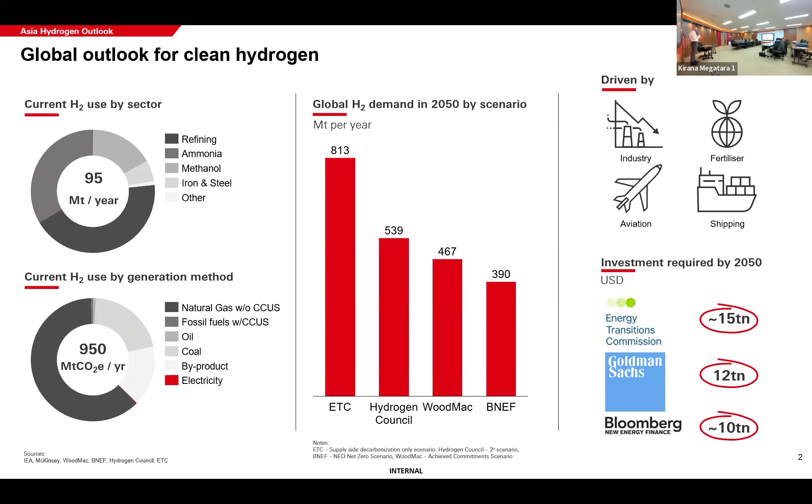So I said we're a commercial bank, we're interested in the commercials. To get to those kind of figures, we're looking at between 10 and 15 trillion US dollars of investment needed by 2050. So significant opportunity for the bank. And going back to that question at the start, why do we care about hydrogen? It's because we need it for net zero and there's commercial opportunity there.

So I can skip through some of these that won't interest the academics and try and skip to the ones that maybe do. But this is the Asia outlook for demand. So it's what I was saying before, but specifically for Asia. There's existing use cases. I was talking about the ammonia, the oil refining, the methanol. They're the existing use cases that we can try and decarbonize now. And as you can see, we're going to try and tail away from the gray hydrogen production mechanisms and try and ramp up green, which is electrolytic, or blue, which is carbon capture.

But then there's these new use cases that we're going to need. In Asia, most of it's going to be steel. So the way the steel industry works, there's primary steel and secondary steel. Secondary steel could be done with electrification. So you can use scrap steel and use electric arc furnaces powered by renewables or geothermal to melt that steel down. But the primary steel, where you're trying to get the iron out of the ore, you need a molecule, you need that reaction, you need the reducing agent.

So where hydrogen plays a role is, instead of using coking coal that we use now to A, generate the heat you need for the steel mill, but B, to actually sap the iron out of the ore, you can replace that with hydrogen. And if that hydrogen is renewable, you can vastly reduce the emissions from the primary steel industry. So there's going to be a mixture of hydrogen use and electric arc furnaces. But a big opportunity, specifically because if you look at places like India and China, a huge amount of steel production. So a good opportunity there to decarbonize.

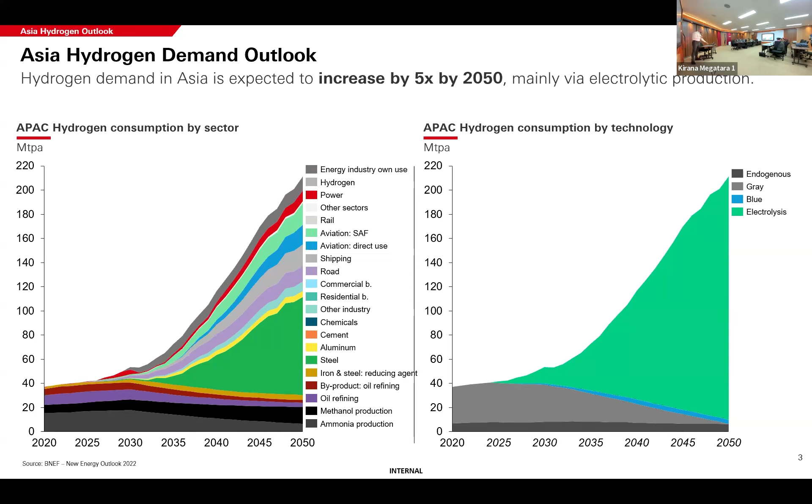And then we've got all these other new use cases that are a bit smaller chunks, but still really important. As I said, like power sectors, aviation, big, heavy, hard to decarbonize sectors. On the right-hand side, we can see from this new uptake in demand, most of it's going to be electrolytic. That's kind of the gold standard from an emissions perspective. So if you use renewables into an electrolyzer, there's no carbon emissions. As I mentioned before, blue does still have a carbon intensity associated with it, so it's a bit trickier to fully clean up, but it is cleaner than the counterfactual.

If we drill down into Indonesia, so I was going to use this slide today. It's not finished, it's not the way I'd like to present it, so forgive the presentation, but the information is interesting. So when I said Asia and globally, it's about 5 times increase. In Indonesia, because we're starting from a smaller number, there's about a 14 times increase to 2050. So to get to 2050, Indonesia is looking like it might need to upscale by 14 times.

And these are the different sectors that are predominantly the focus for Indonesia. So mainly it's looking at aviation fuels, road transport, steel industries in there, and a little bit of ammonia production as well. And we've been speaking to companies today at the event, looking at where their interests lie in these different sectors.

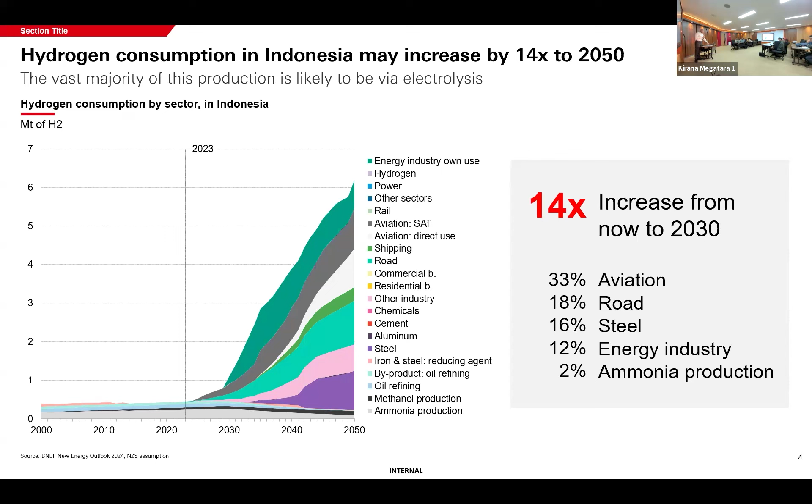And most of that, again, is going to come from electrolysis. The thing with Indonesia is it's very blessed with abundant renewable options. You've got geothermal everywhere. You've got good solar capacity factors in the south. You've got good wind capacity factors. You've got hydro. You've got a choice of ways to use renewable power for hydrogen production. So why would you look at blue?

This is what I was going to present today as well about the Southeast Asia ecosystem. So it's not just about how can one country decarbonize its own energy or carbon intensive industries. It's how can you play a role in a broader ecosystem. So this is for Southeast Asia. And again, it's different use cases. So steel is a bit more important than just in Indonesia, and shipping is a big chunk.

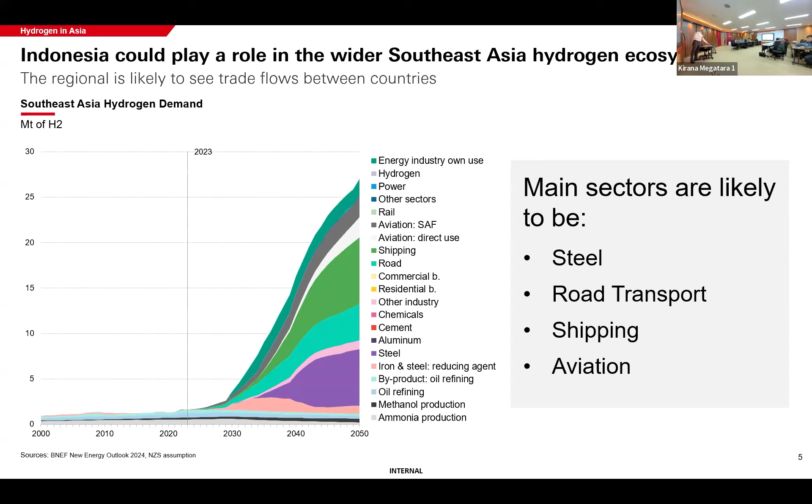So to decarbonize shipping, and we were just talking earlier about emissions like NOx emissions, shipping is really tricky. It uses heavy fuel oil at the moment. And again, it can't really use batteries. For big shipping containers, at least, you need a kind of molecule. It's looking like it might be something like methanol produced from hydrogen and carbon capture, or ammonia. So shipping is going to be really important in Southeast Asia, and there's going to be multiple hubs that are required to produce and store green ammonia or green methanol to fuel these vessels.

Next up is kind of a lot of data on one slide, but this is basically showing where we are seeing, as a bank, where the off-takers for these projects are. So we know hydrogen is important. We know a lot of companies are trying to invest in this space. Where's it actually happening? What's the real world scenario?

So if we focus mainly on the left-hand side, we can see the top 15 off-takers by volume, so people or companies that have signed off-take agreements for clean hydrogen or clean ammonia or clean methanol, the derivatives of hydrogen. It's all like I was saying before. We've got steel, so POSCO is a big steel manufacturer. We've got Sinopec in China that's in oil refining. Fertiberia, and we've got Yara on fertilizers. So it's the heavy industries that we talked about earlier that are really committing to this and signing agreements.

And it's the same kind of picture for the amount of deals that they're doing. Most of this is driven by the EU. So at the moment, there are subsidies to support the production of this because this is expensive. Green hydrogen is a far more expensive way to produce the molecule than conventional methods. But in the EU, there are mandates where you have to do something, but also subsidy mechanisms to reduce the costs. So that's why we're seeing a lot of activity in the EU.

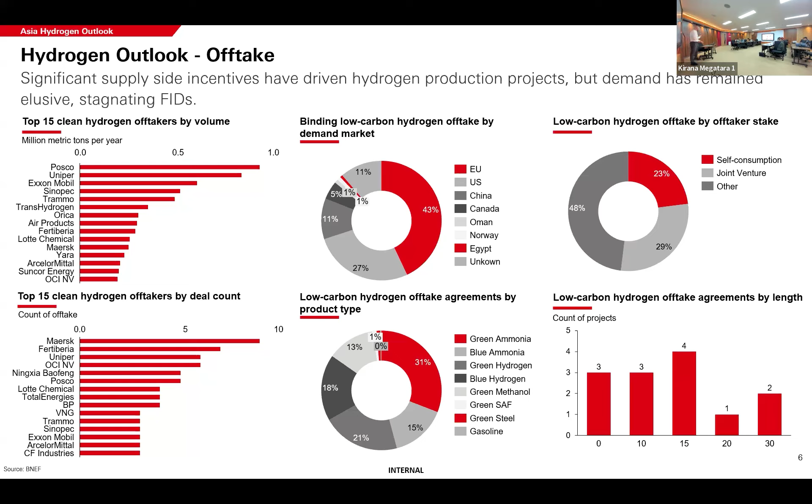Most of this is quite long term. So if you think of people in the room that might be experienced with oil and gas or the LNG world, you kind of have spot markets or short-term contracts. You might buy a volume of gas over a year. With hydrogen, there's no liquid market at the moment, so it's looking like really long deals. We did a deal in Saudi that was a 30-year contract, but it's looking like between 10 and 20 years is what a project contract might look like. So someone's going to have to say, I will buy a certain amount of green hydrogen over the next 20 years at this price. So it's quite tricky commercially for us to get our heads around.

So fertilizer is the no-brainer, right? There's a prioritization of where you'd use hydrogen. Hydrogen you can use anywhere you need heat or anywhere you need electricity. You could use hydrogen, but would you? And there's a kind of conflicting priority list. Electrify if you can. It's the most efficient way of doing it. It's the cheapest way. Solar and wind are really cheap now, easy to deploy at scale. But fertilizer is the no-brainer. As I said earlier, you can't electrify your crops.

So ammonia is then used to turn into urea, to turn into fertilizers. But predominantly, we're saying that pretty much half of the global population is now propped up by the fertilizer industry. So as we fertilized crops and got higher yields, it supported global growth in population.

So we can't just stop this. We can't say, right, we're going to stop using fossil-based fertilizer. These people need to be fed. And 2% of global emissions is quite significant. And we can decarbonize that using clean hydrogen. So it's something that we have to do. We're doing it now. All we have to do is replace that hydrogen that's going in with a clean version.

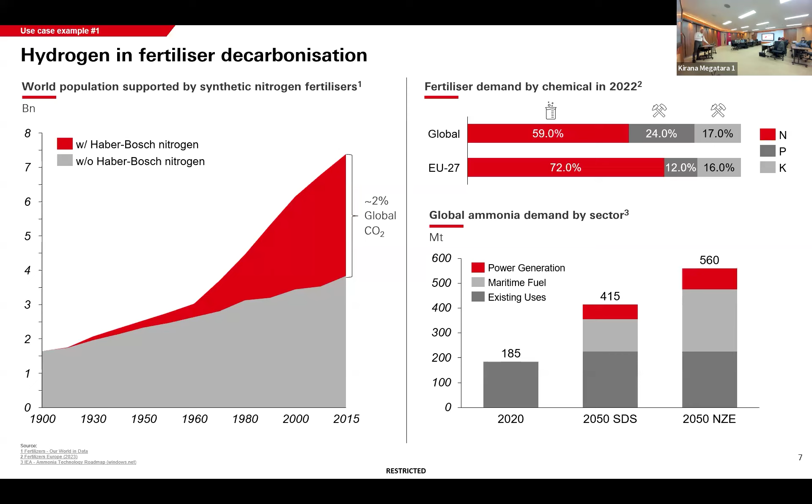So it's going to play a role where you have these nuances of, yeah, you can't roll out the renewables for a variety of geopolitical reasons or logistical reasons. That's where it will play a role. So fertilizer is a no-brainer. That's one of the things that we definitely will support and should be at the top of the list.

Next up is what I was talking about with steel. So this is from Bloomberg data. How do we get to 2050? And as I was saying, predominantly we're looking at direct reduction with hydrogen. So this is using hydrogen as the reducing agent, but also potentially as the heat source to produce primary steel. Secondary steel can be scrap with electric arc, so you can use renewables to melt the steel.

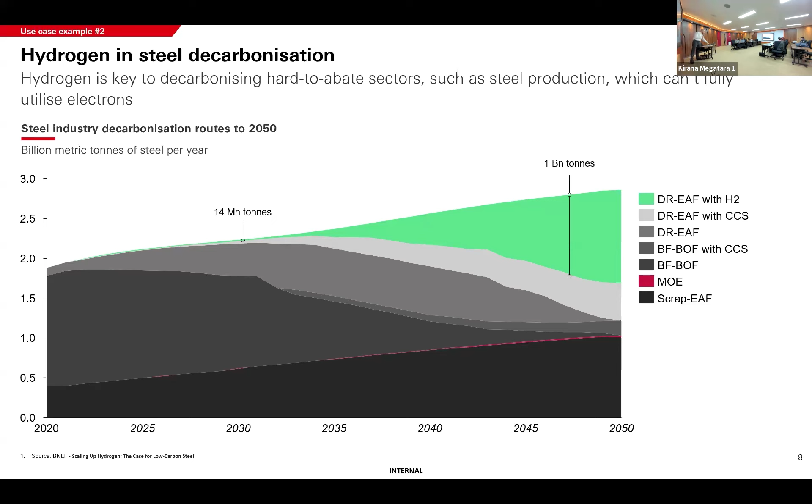One interesting one where there's a lot of research, and at the moment it's only playing a tiny sliver of a role, is molten oxide electrolysis. So very early stage, very low TRL, very much at the academic research stage. But this is looking at using electrification to power a molten oxide electrolyzer. All electrolyzers have an anode, a cathode, and a separator; it's a different chemistry to what we're used to with low temperature electrolysis that we're using now. But something to definitely keep an eye on because it could play a crucial role in replacing the need for hydrogen and scrap EAF.

Aviation, another one that is hard to decarbonize. So these are two scenarios. One is if biofuels get cheaper and rolled out at scale, and the other one is there's a feedstock constraint on biofuels and hydrogen takes off. So two ways that hydrogen is going to play a role. As I said, hydrogen can be either burnt in a turbine or electrochemically converted in a fuel cell. They can be used for aviation of small scale planes. So if you think of an aeroplane that might be 20-seater to 40-seater, relatively small, like regional transportation, you could use hydrogen in gaseous form.

When you go up to the bigger kind of flight that got me here, that's going to have to be a sustainable aviation fuel, but you still use hydrogen to produce that. It's called power to liquids. So you get your hydrogen from somewhere, you get your carbon from somewhere, you use the Fischer-Tropsch process, and you produce a synthetic kerosene. That's a drop-in fuel for the aviation industry.

So on the right-hand side, that could be hydrogen playing 55% of the role of decarbonizing aviation by 2050. But even if biofuels are rolled out more predominantly than hydrogen, even then it's still 29%. So to decarbonize aviation, hydrogen is going to play a huge role. Lots of research opportunities there.

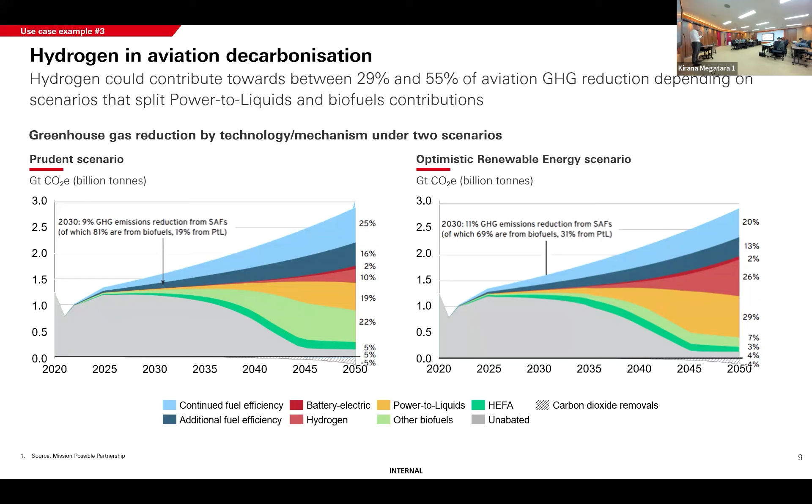I think there's some stuff recently about, so you're going to have to cryogenically cool hydrogen, so minus 253 or whatever it is. So when you've got liquid cooled hydrogen to get enough energy density on board, you can use that lack of heat to cool the motors in the propellers, for example, and you can increase the efficiency of the powertrain as you boil off or get the hydrogen back into gaseous form. You can use that temperature difference to increase efficiency of the powertrain. So lots of innovation happening in the aviation world.

Maritime, different picture, but same kind of message: currently we use a fossil fuel. We need to move away from that. Biofuels probably won't play a huge role. And it's going to be a kind of competition between ammonia and methanol. There's pros and cons for each, and I personally think we're going to see them split between different types of

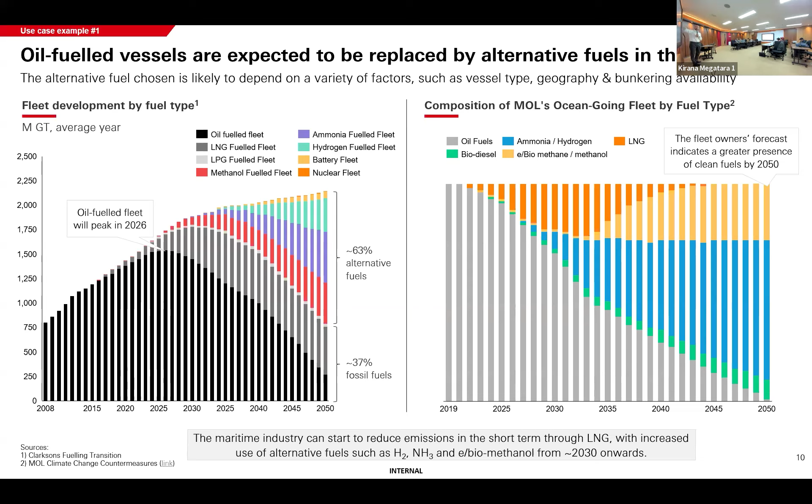And as we can see, big companies like MOL, they've got a strategy that shows as they move out to 2050, ammonia is going to play a huge role for their shipping. Some bio might play a role, or E-based, synthetic-based methanol.

So one slide that I sometimes don't present in the bank because it would bore bankers, but I'm hoping will land well with you guys because you're academics. Because it has an equation, all right? I'm itching to stay involved in the academic world, and I try and drop things in when I can to make an argument. So this is the argument for power.

So we talk to a lot of companies who are looking at decarbonizing their power generation by burning hydrogen in a natural gas turbine or burning ammonia that was made by the hydrogen into a coal facility. And this is where it shows that, yes, if you move up towards 100% volume of hydrogen burnt in a power turbine, you can reduce your emissions. So the 100% reduction in carbon comes with 100% blend. But the problem is it's a non-linear curve, right?

So hydrogen, because of energy density or the lower heating value difference between methane and hydrogen, sorry, the volumetric difference means that you need to put in about 3.5 or 3.3 times as much flow rate of hydrogen to get the same amount of calorific value for the burn.

So when you hear companies saying we're going to put 20% blend of hydrogen into our turbines to reduce emissions, it might sound great, but if you run the numbers, 20% blends or 30% blends, you're still not even reducing 20% of your emissions. Sorry, up to 50% blend rate by volume is 25% reduction in emissions. So you kind of need to be getting up into this range to make a material impact or more than 50% reduction, but then you're up to 80% blend rate to 100.

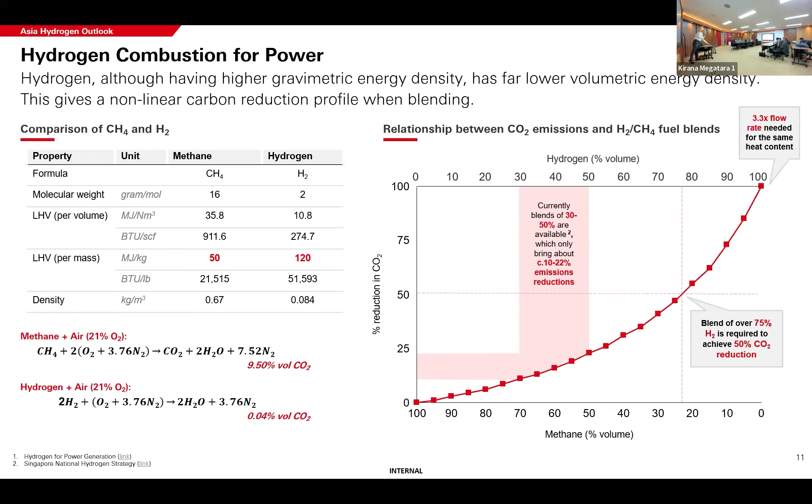So this is the same thing for ammonia into coal power reduction. You need to be at the real upper end of those blend rates up to 100% to really make a difference. And that's costly. So at the minute, natural gas or methane is quite cheap, but it's carbon intensive. Hydrogen's quite expensive and you need 3.3 times more of it. So it's a really tricky problem with the power sector. So that's why it's at the lower end of the priority list, but we don't rule it out because, as I said, some people, some regions, some situations require this alternative.

So that's where, as I was saying, you need to prioritize where you use hydrogen, where you use liquid hydrogen, where you turn it into a derivative, and where you use that. And there's a multifaceted picture you have to build up of what's my application, where am I producing the hydrogen, where am I going to use it, in which sector,

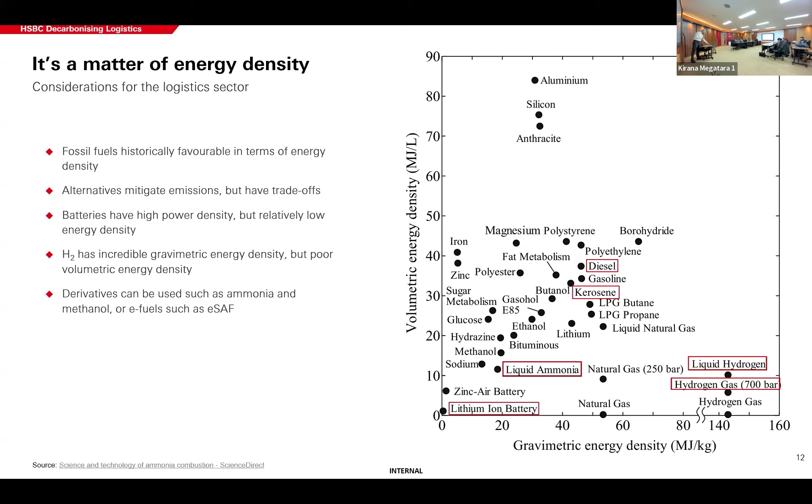and it makes it difficult for us in the bank to look at different projects, different companies, different technologies, because there's no easy broad brush to say, yes, this thing works. You have to look at it in every detail of what location is it in, what asset, what use case is it in, what's the government policy, all these kind of things. So they keep me very busy.

Indonesia, we kind of touched upon this at the start. So this is something that I didn't present today, and I'm quite happy I didn't, because this is the way we normally look at hydrogen production. So where you're going to make it, the levelized cost of hydrogen is mainly made up of the price of the electricity you use for the electrolysis, and the other part is the capex. So these are the two biggest contributors to the cost.

So what we normally do is look at this. We map out where's the best solar irradiation, where's the best wind profile, and where's all the water. If those things all line up, that's where you should be producing your hydrogen. But this is kind of like a Eurocentric view. And when I came here and I was on a panel this morning, I heard about the immense geothermal potential and the hydro that is in Indonesia. So Indonesia bucks the trend on this, even though it makes the same point.

Capacity factor is a huge thing. So the technology, electrolysis itself, wants to be used at a steady state or a base load. So this is where finally I get to use my PhD in the corporate world, is the degradation that's caused to electrolyzers, specifically PEM or alkaline, whatever chemistry it might be. They don't like transient loads and they don't like stop-start cycles.

So if you have a project, say for example, that has really good solar potential, but only for 4 hours of the day. So it comes on, electrolyzers for a while, dips off. That's really bad for the electrolyzer. It's going to keep degrading the electrolyzer. It's probably only going to last like 1 year or 2 years. And then you have to replace it, and they're very expensive. So the whole capex for the project goes up.

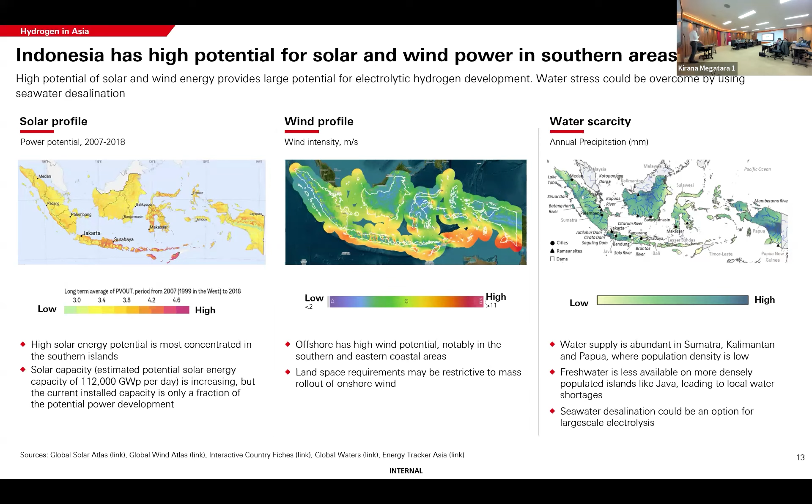So you could use the heat that comes out of the Haber-Bosch process to feed into your solid oxide electrolyzer and increase the overall efficiency of the system. So there's different ways that now I think companies are going to be having to look at different innovative solutions out of the research and development world that can really increase the efficiencies of production and reduce those costs.

But also what we've noticed is it's not just the capture rate that's important with carbon capture, it's the upstream emissions leakage. So if you're using natural gas in your process, but you've got a load of leaks as the gas comes in, obviously methane has a much higher greenhouse gas intensity than carbon dioxide. That's going to bump up your emissions as well. So it kind of reinforces the fact that the focus should be on electrolysis.

And then costs. I think we'll finish up on costs because I think it'd be great to have a discussion and have some questions and talk about some research and development opportunities in the space. But finally on costs. So these are two plots that show the picture last year and the picture in 2030 of different regions and how cheap or expensive you can produce hydrogen in US dollars per kilogram. Indonesia's up here, which is not great news, I'm afraid. Solar PV is the red part.

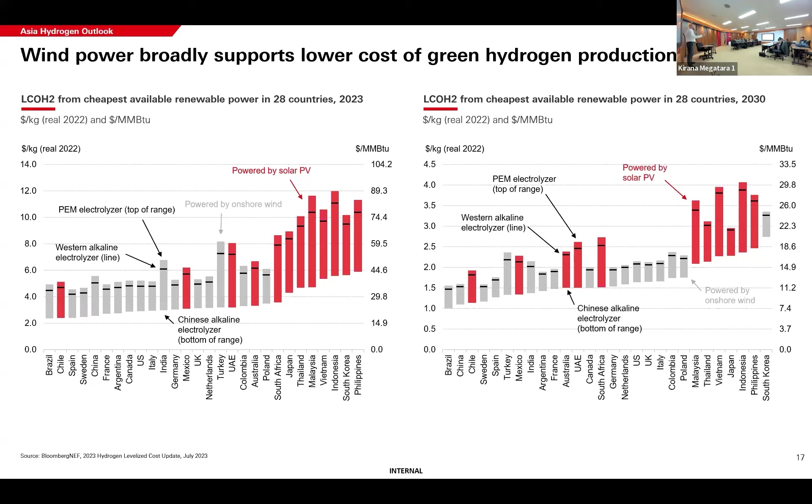But it depends on, as I said, where's your solar? This is averages as well. So average over Indonesia is not that great, but Java region is really good. And this shows that over time, these bars start to converge because electrolysis manufacturing gets cheaper, the scale up of production brings the economies of scale down.

So that was a bit of a slapdash, in a nutshell, hydrogen view. Some of it was from the commercial angle. Hopefully some of it had a bit of an R&D angle. But from our perspective, where we'd really appreciate a lot of help from the academic world is, I've mentioned some low TRL technologies. So there's a lot of chemical engineering that needs to be done, a lot of chemistry on catalysts and different materials, also for storage of hydrogen and transportation.

So there's companies now that are proposing to look at scaling up or spinning out of universities technologies in liquid organic hydrogen carriers. Because, as we said, mainly volumetric energy density for hydrogen is really bad. How can you bind that in either a metal organic framework or an organic hydrogen carrier? How can you get that hydrogen from where you made it to where you need it most efficiently, most cost effectively? So there's different ways to store hydrogen and transport hydrogen that are in the research stage.